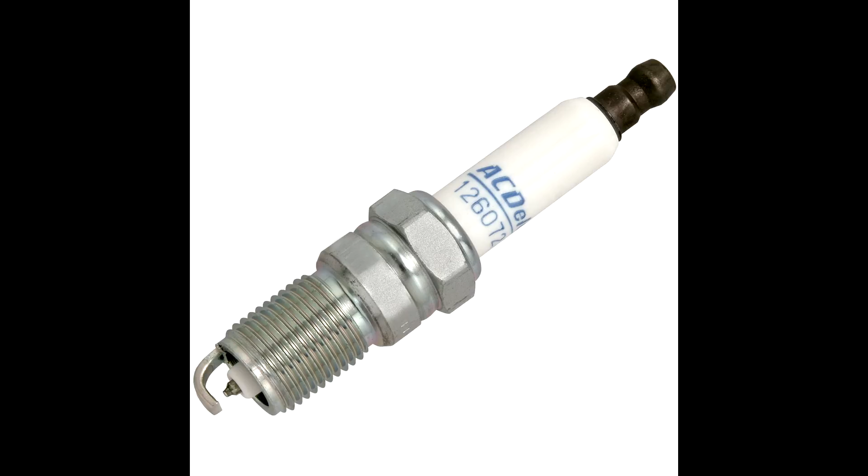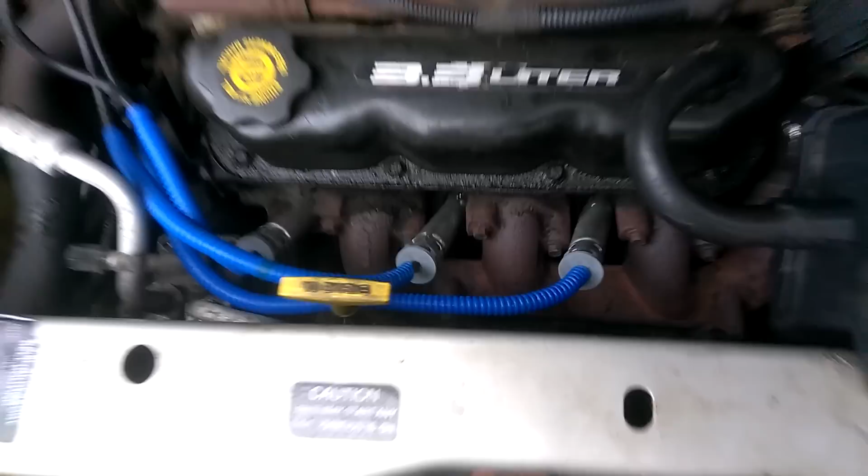I assume if you've clicked on this video, you already know you have a no spark condition. However, I'll just quickly go over what that means and how to determine if you actually have it. No spark means that your spark plugs are not firing. Unless all your spark plugs failed at the same time, it probably has something to do with the electrical system preceding your actual spark plugs.

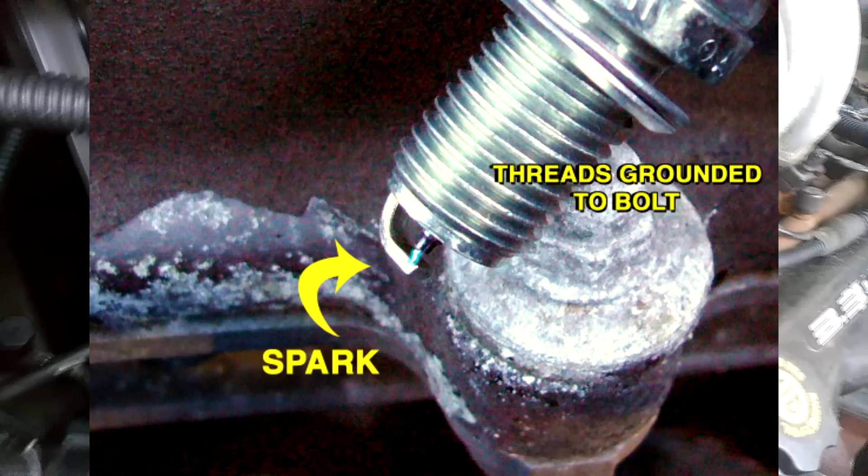The easiest way to test this, of course, as you've probably done, is to unscrew a spark plug, put it into the wire, the little socket that you removed to take the spark plug out, and ground it, crank the engine, and see if the spark plug turns on or not.

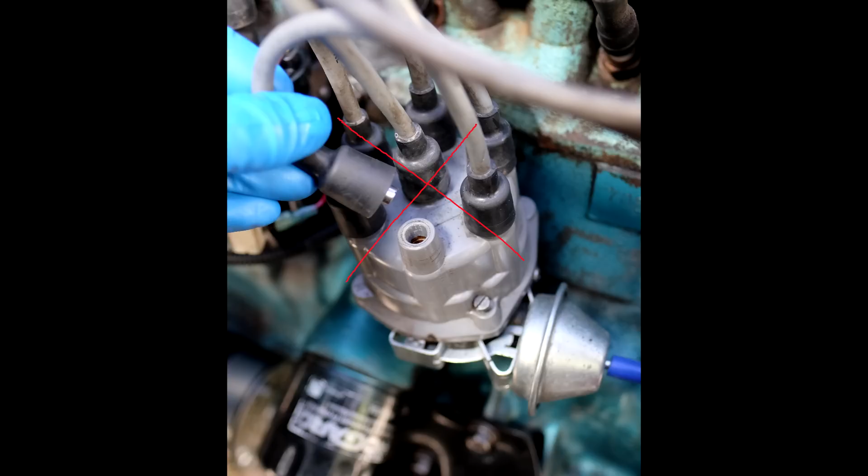Chances are all your spark plugs probably aren't worn out, so we can move on to whatever is right before the spark plugs. Now, my engine is a distributorless system, which means I only have a coil pack right before the spark plugs.

Now, before you go into testing your ignition coil pack using a multimeter and checking different resistances, see if they line up, it's easier to just unplug the actual connector that goes into the ignition coil and test if you have power there. It's very helpful to have a test light here since it allows you to easily verify whether or not you have power going through a connector.

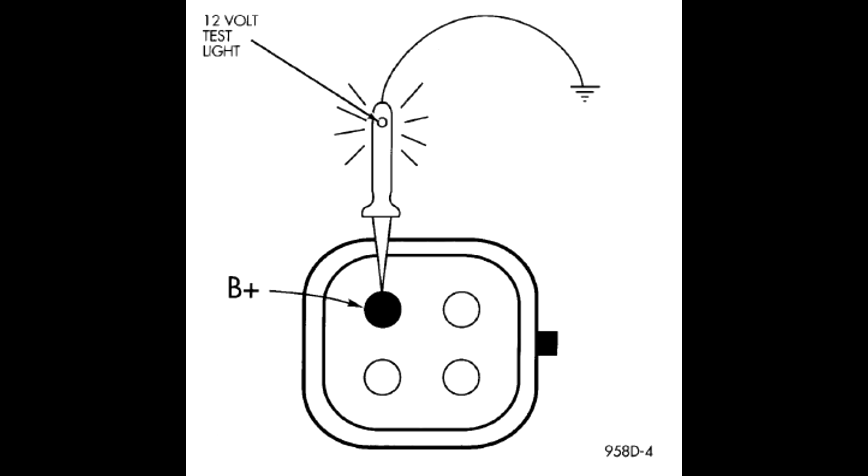What you're going to do is plug in one end of the test light into the battery plus terminal and have the other end just go to ground. Any bare metal surface on your car will do, assuming that piece of metal is grounded.

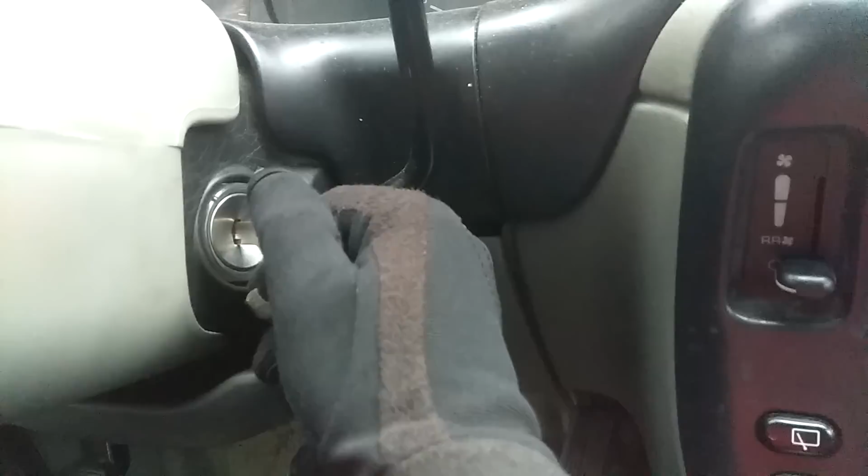With that in place, we're going to put the key into the ignition and turn it to just before you would crank. I'm going to refer to this as key on, and it's not the same thing as cranking the engine. Cranking is when you go one step further and you twist the key a little more, there's a little spring and you feel resistance and the starter motor starts turning.

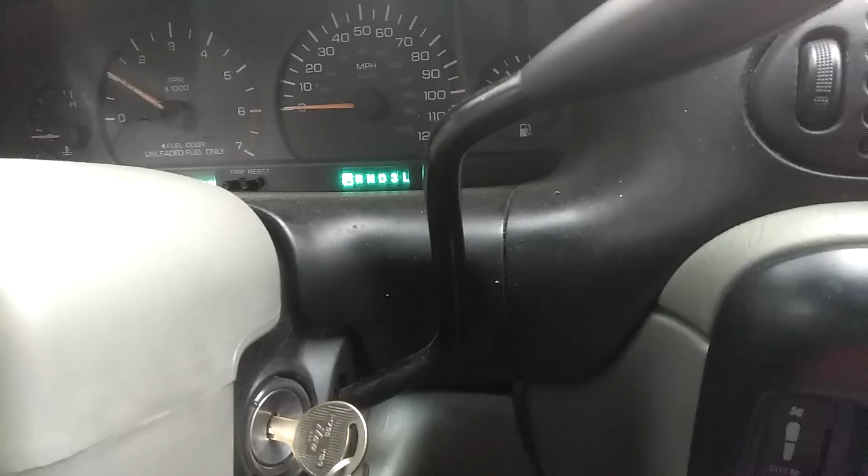If you put the key on and you leave it there, what should happen is the light should flash on, and then it should turn off after like 1 second or so. If your light does turn on momentarily and then turns off, then you're good. If your light, however, does not turn on at all, that means that there's an issue with your ASD relay. That's the auto shutdown relay.

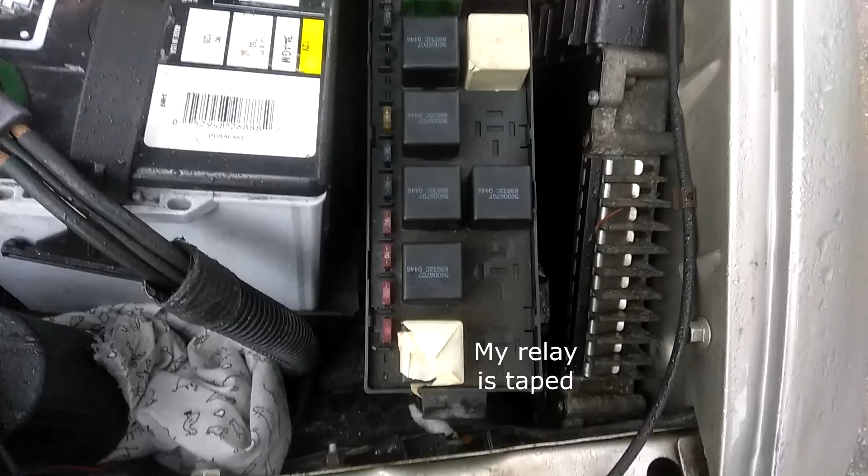The purpose of this system is to avoid unnecessary fires by turning off power to the injection systems, the ignition system, and overall just making sure that your engine shouldn't be running when the car is not on. The ASD relay will be located in your fuse box, and you can look at your fuse diagrams to figure out exactly where it is.

There should be a couple of other relays, the little cube looking things, that are exactly like it, and you can just take one out that looks unimportant based on the wiring diagram and put it in your ASD relay slot. And if you do the light test again and it works, that means the individual relay that you took out and replaced is bad.

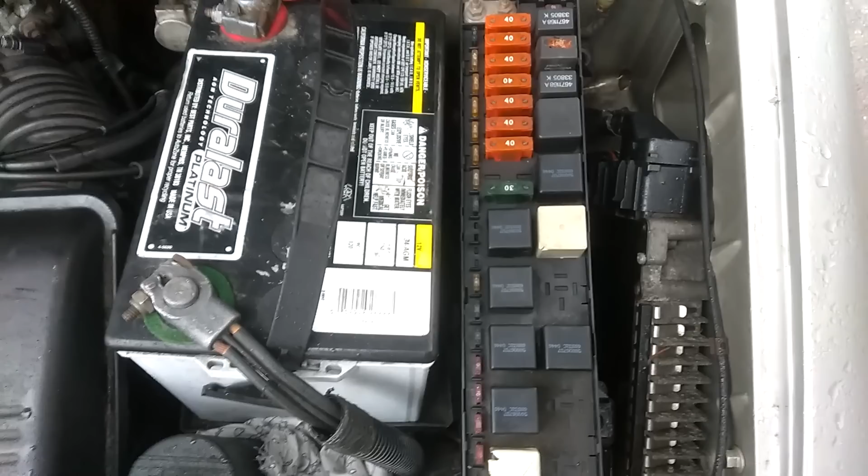You could, of course, go to AutoZone or RockAuto or somewhere online and buy a new relay, but generally it's kind of a waste of money because you can just test one of the other relays that you have in your car that belongs to like the windshield wipers or something rather inconsequential compared to the actual ignition system.

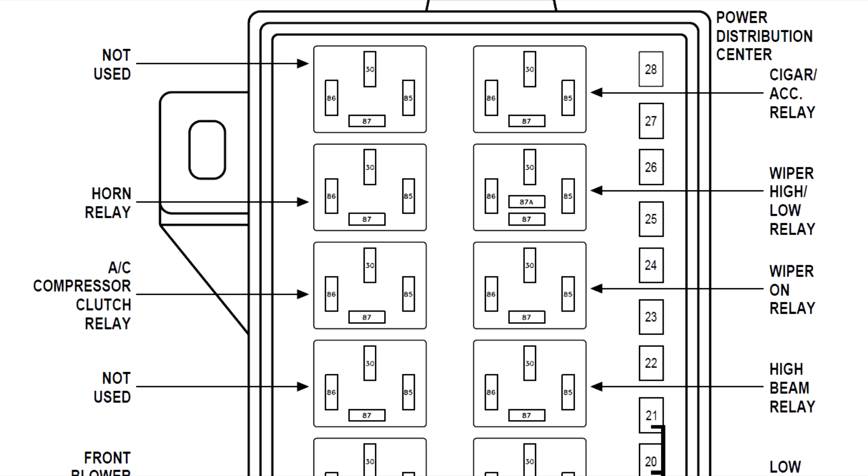Moving on, if your ASD relay is good, which means that your light turned on when you put the key on and then turned off, please note that in the following test you have to put the key on and wait for that ASD relay to flash before you begin cranking the car. If you don't do that, you won't be 100% sure that your crank is what's setting off the light or if it's the actual ASD relay going off. That's why every time you do it, you have to wait a couple seconds for that ASD relay to go off, and then you crank.

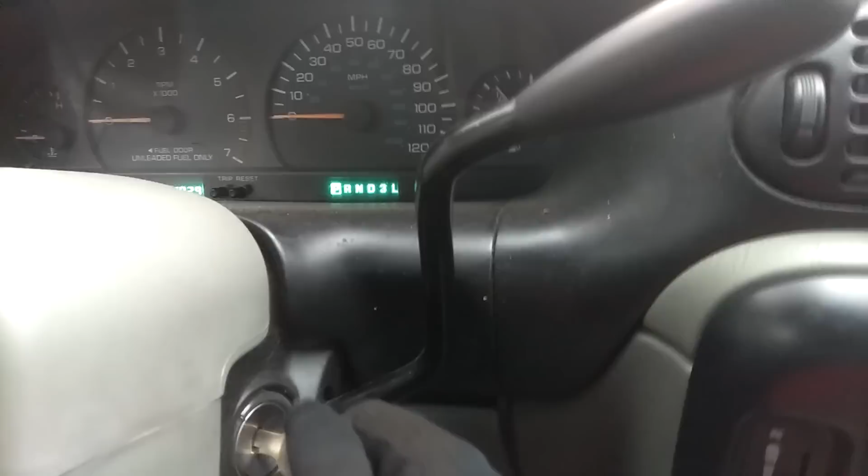Now what you're going to do is you're going to crank the engine. And there's one of two things that can happen here. If you crank the engine and the light flashes, that's going to be the first option. Or you crank the engine and the light does not flash.

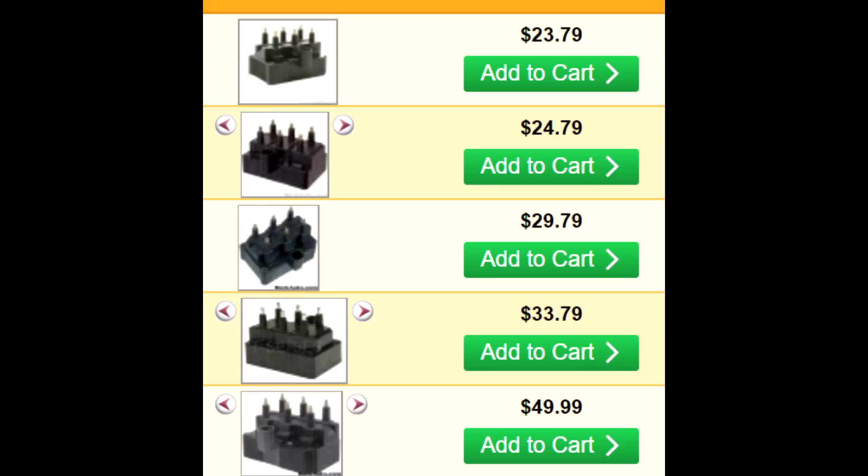If you're getting a steady light when you crank the engine, that means that you are getting constant power to your ignition system. And your power issue lies between your connector and the spark plugs. So either the ignition coil is bad or your spark plug wires are bad. And these are both very easy things to test. They're pretty cheap parts regardless. The service manual covers all the specifications for testing these components.

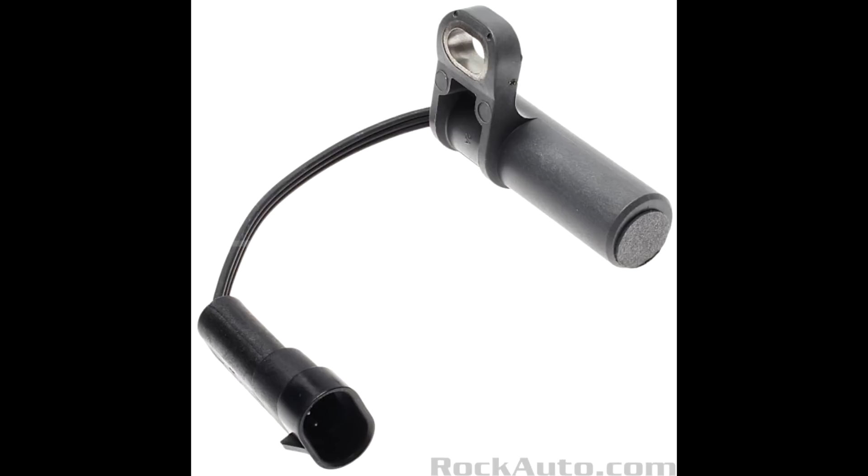If your test light flashes momentarily when you crank the engine, that means that your crankshaft position sensor isn't getting a signal to the PCM. This can either be an issue with the wires coming out of the sensor or the sensor itself, and we'll cover how to test all this later on in the video.

If, however, like me, you are not getting a steady light on when you crank the engine, that means that you are not getting power to your ignition system when you're cranking. And this test is very helpful right now because we know for a fact that the wiring between the PCM and the ignition coils is good, because in our first test, our light turned on. However, it's only when we crank it that we don't get power to that.

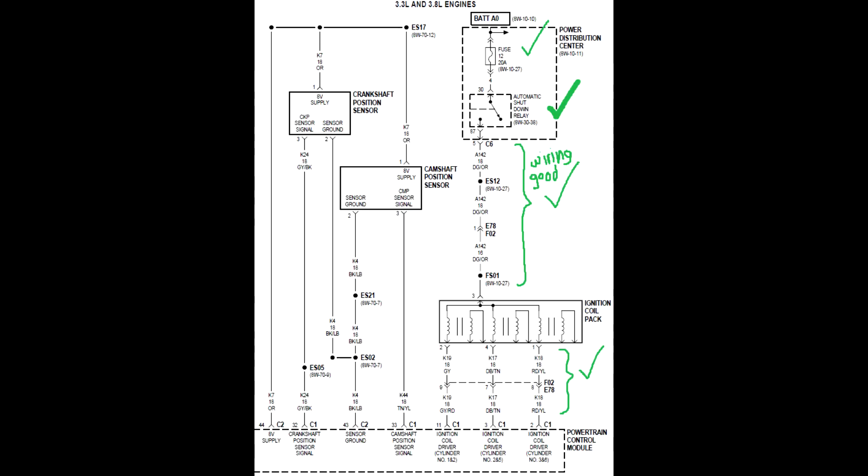The next part of the test involves unplugging the crankshaft position sensor, and that's located on the bottom right part of the engine. It's a little tough to get to, but you don't actually have to unplug the sensor from the engine. You just have to unplug the connector that goes from the sensor to the rest of the wiring. If we crank the engine again, we should have one of two results now. Either we're going to have a flash or we're not, and both of these tell us quite a bit.

If your light did flash, that means that your crankshaft position sensor, the one you just unplugged, has a short in it, and you just need to replace that part. Or if you replace the part and it still doesn't work and you repeat the procedure and you get the same issue, there's a short in the wiring after the connector to the sensor.

The other option is, of course, that you didn't get a flash at all. And this is the toughest of the options, and of course it's the one I got. What this basically means is that there's an issue with the wiring of either the crankshaft position sensor or the camshaft position sensor. Of course, this could also mean that the sensors are just bad, but that should be a pretty straightforward fix. You just swap the part in and replace it. The tough part now becomes figuring out what part of the wiring is bad, or are the sensors bad?

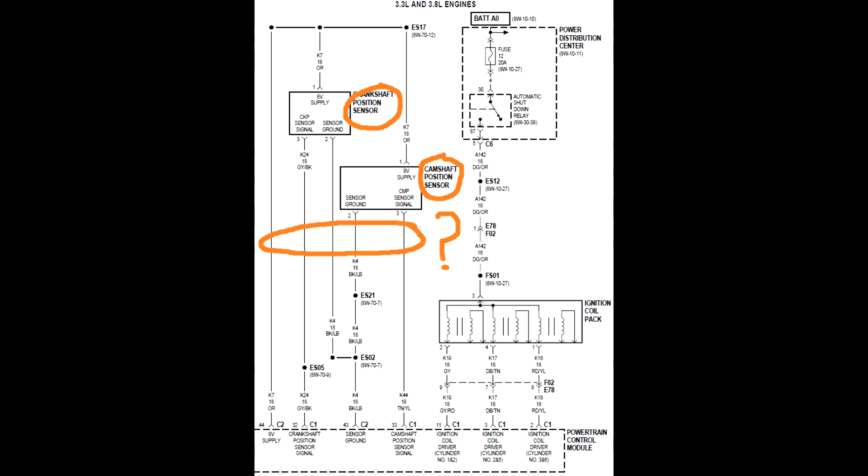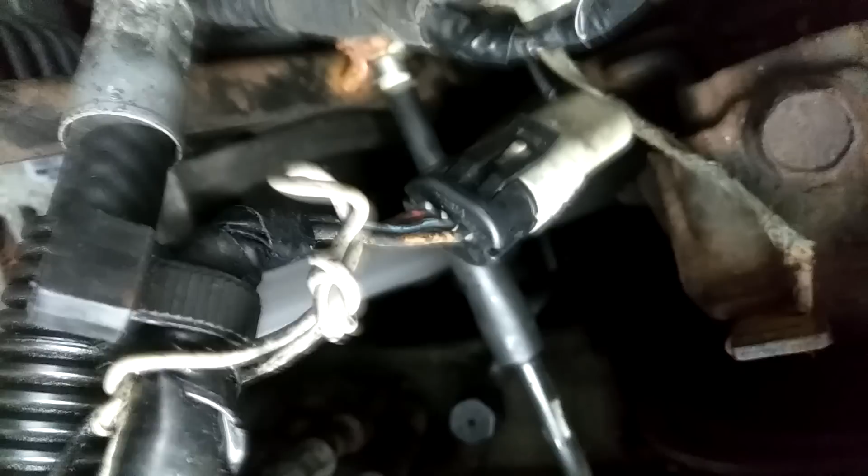Both of these sensors have 3 wires that come out of the sensor, and the setup is exactly the same. One of them is an 8-volt power supply to the sensor, one of them is a signal ground, and one of them is the actual signal itself. Please double check with your wiring diagrams. However, on mine, on the 3.3 liter engine, your 8-volt power supply is on the rightmost pin if your latch is on top. The sensor ground is in the middle, and your sensor signal wire is the leftmost one. Just to confirm, your 8-volt power supply will be an orange wire, your ground will be a black wire, and your sensor signal should be a yellow wire.

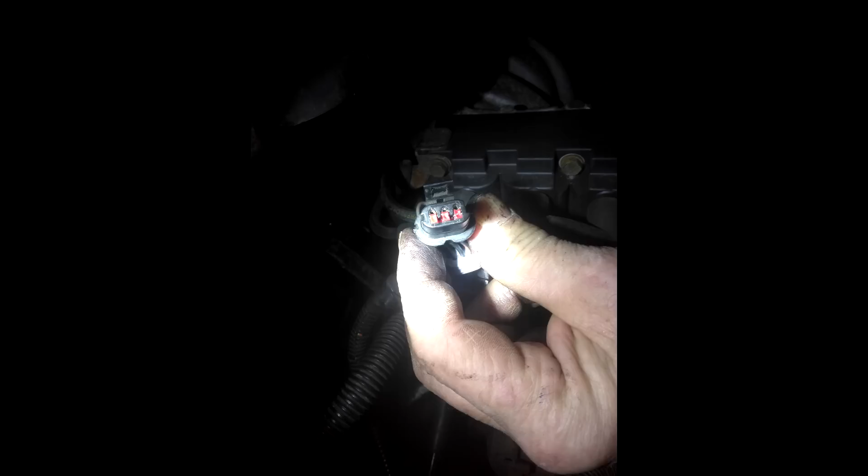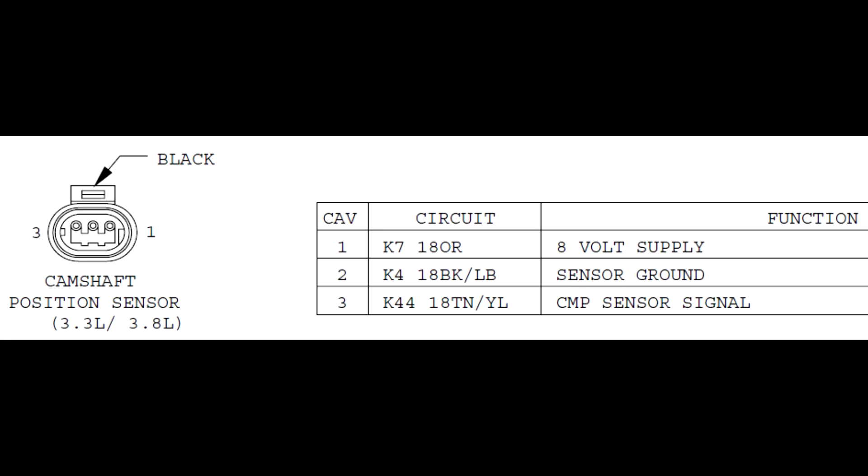So what are we going to do now? Basically, all we're going to do is unplug the sensor cables and check for continuity and what resistance we have between the sensor connector and the PCM connector. Now, if we look at our wiring diagram, we can see that we have circuits K7 18 OR orange, circuit K4 18 black, K44 tan yellow. So we're just going to find these and see where they end up on the PCM pinouts.

Now we're just going to look at our PCM pinouts and identify which circuits correspond to what pin. The camshaft and crankshaft sensors are pretty easy to find. You're going to have 2 connectors, C1 and C2. All that you want on C2 is pins 43 and 44, which correspond to the same circuits for our sensor ground and our 8-volt supply. And on our module for C1, you have to make sure that you're on the right engine. We're going to use our crankshaft position sensor signal at pin 32 and our camshaft position sensor at pin 33.

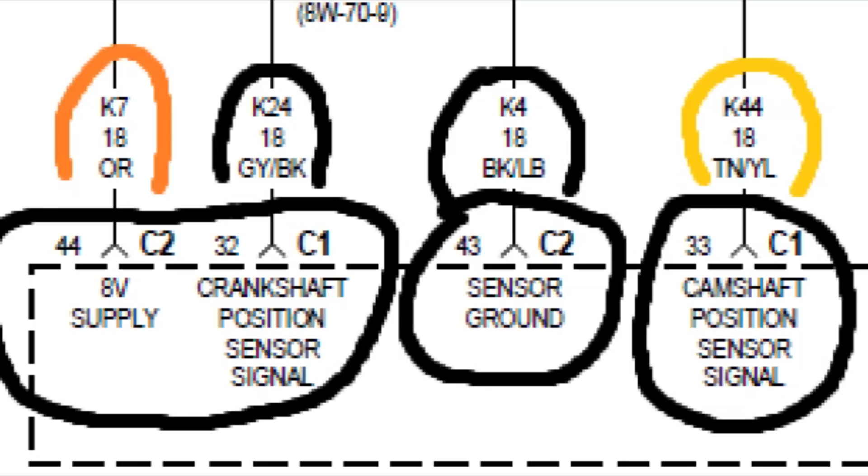So now all you're going to do is take one of your multimeter leads, put it into one of the pins on the sensor circuit connector, and put the other lead to the corresponding pin in the PCM. Just don't shove them in there because these pins are quite delicate. You don't want to warp the inside of the connectors. Now we're going to put our multimeter on continuity or a diode test. That's the one where if you touch the two probes together or touch the two ends to a continuous piece of wire, it'll beep.

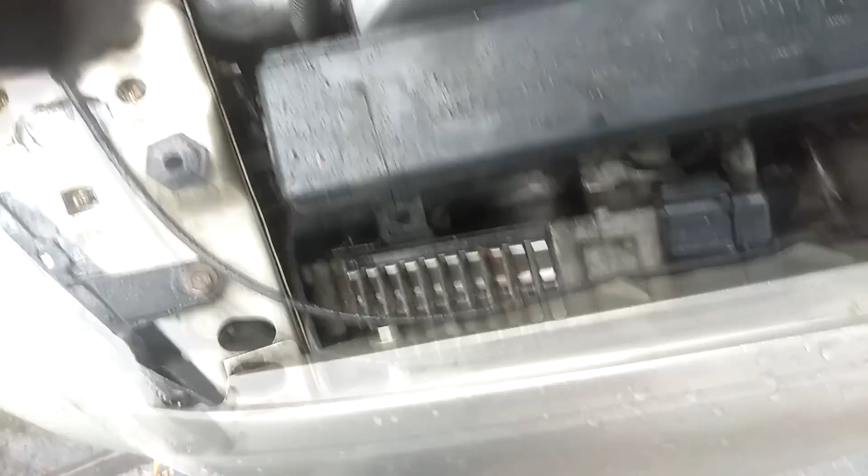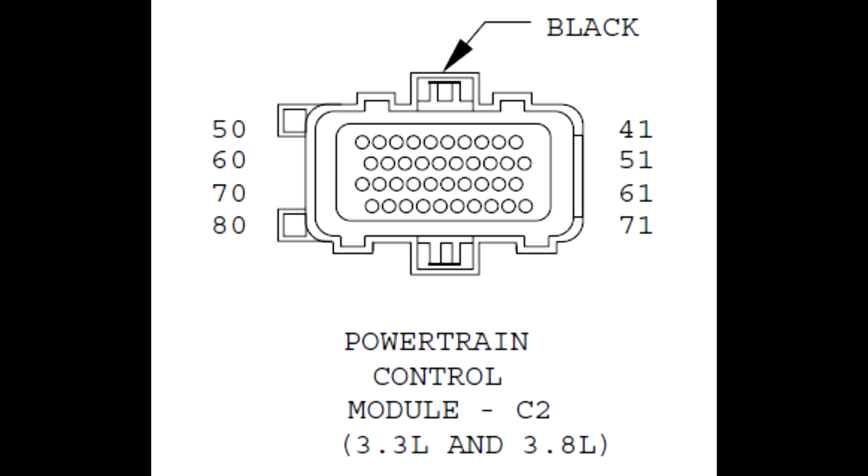Now all you have to do is, for example, if you want to check the sensor signal for the camshaft position sensor, put one of your leads on the sensor signal connector, and then put the other one on the pin corresponding to the camshaft position sensor signal, which would be pin 33. And you're going to repeat this for both connectors, and make sure that all the wires have continuity and fairly low resistance, preferably below 1 ohm.

If you don't have continuity at all, you can try sticking a needle in the wire, a very small needle, behind the connector itself to make sure that the wire is not broken. Otherwise, you know that your actual connector is wonky and that the connection between the connector and the wire itself is bad. So what do you do if one of your connections is bad?

Well, you have to track down that wire and find where it's broken. And if you can't do that, you're going to need to somehow splice the wire from the PCM to the actual sensor itself. That's kind of a tough job in and of itself, but I don't see any other way of doing it short of taking apart the entire wiring harness and finding exactly where that is, although that is the cleanest case. That is the best end result.

And the alternative, of course, is what happened to me, where I test all these wires, check them all for continuity, and they're good. All the wires are good. So what's the deal right now? Now we have to test whether or not our sensors are outputting the proper values that they should, and whether or not they're working correctly when we actually crank and start the engine.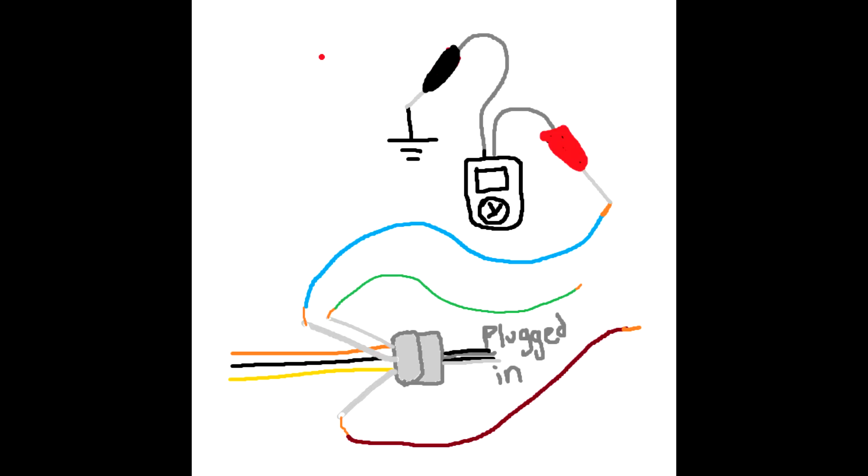The tricky part, of course, now will be testing the sensor signal wires when the car is being cranked. Most multimeters won't be able to resolve the signal quickly enough to actually get you a real reading. The actual signal that is going from that sensor alternates between half a volt, so 0.5 volts, and 5 volts.

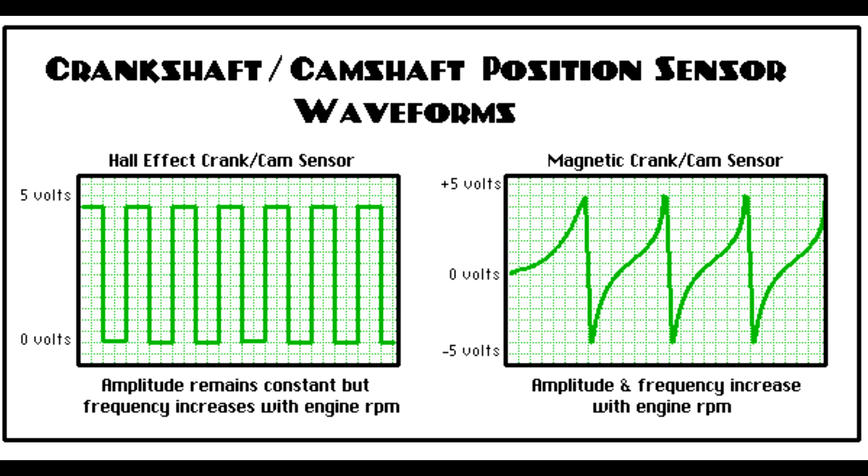Because the camshaft and crankshaft position sensors are detecting little notches in a flywheel that are, I don't know, maybe ½ inch apart, and the flywheel rotates at 300 to 400 rotations per minute, the time between a ½ volt signal and a 5 volt signal will be a couple of milliseconds. It's extremely quick.

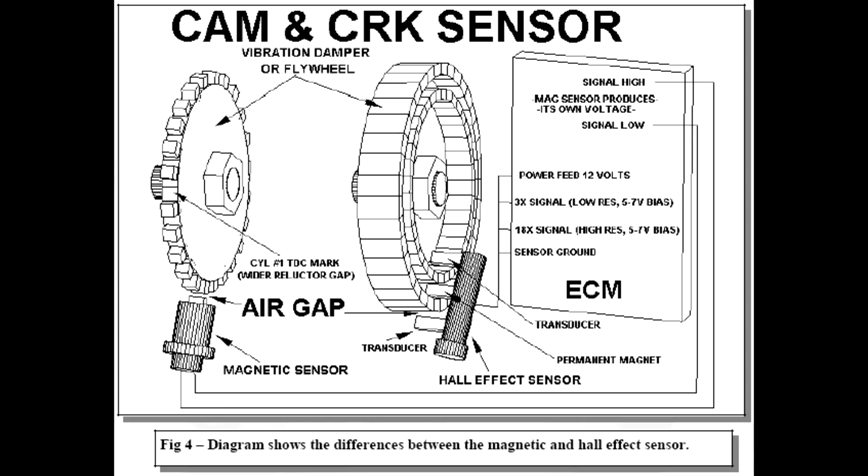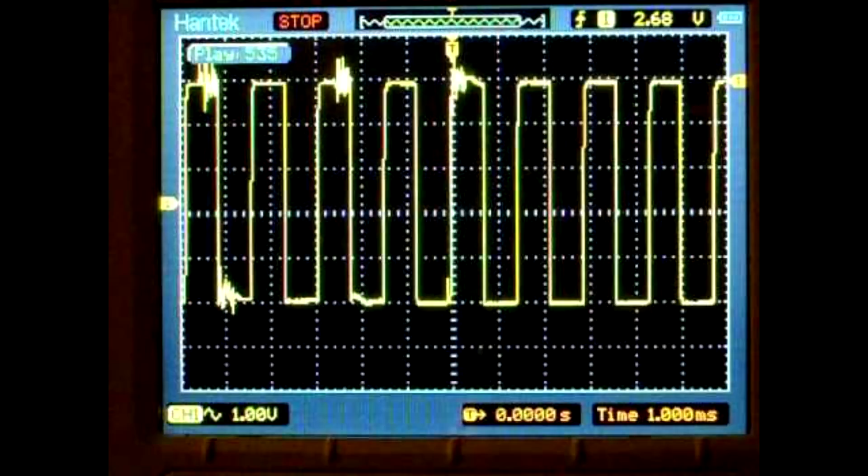If you had an oscilloscope, it would be very easy to actually see what those values are because you have a voltage versus time graph, and you can just look back, change the scale, and examine what your peak voltage times are. However, in my case, I don't have $300 to $400 to spend on a scope, so I'm stuck with my multimeter, which updates, I don't know, maybe 5 times a second.

When you're reading your crank values for your signal wire, I've found that an acceptable value will be 3.5 volts. Now, obviously, your value will fluctuate. You'll see a bunch of zeros, you'll see a bunch of maybe sixes. Generally, because the multimeter averages by taking a root mean square, you'll see around 3.5 volts.

Since you have no way of actually resolving whether or not you are getting 0.5 volts, then 5 volts, unless you have an oscilloscope, it is very, very important that you stick to this 3.5 volt rule. Make sure that both your camshaft and your crankshaft position sensor signal wires are reading the same value on your multimeter when you're cranking your car.

In my case, I had the proper 3.5 volts on my crankshaft position sensor. However, on my camshaft position sensor, I had 2.5 volts. And at first, since I was doing this for the first time, and I didn't really have that great of a multimeter, I figured, hey, 2.5 volts is good enough. As long as it's reading something, it's probably good enough. I was very wrong. It has to be 3.5 volts, or one of the sensors has to match the other.

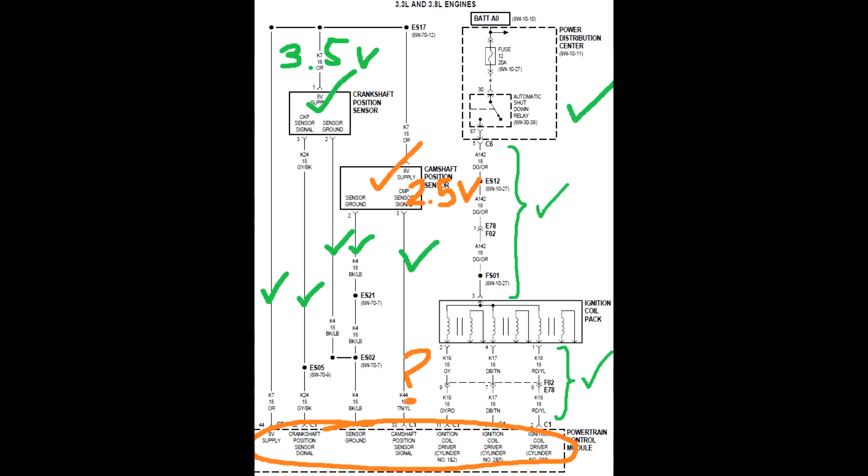I ended up purchasing an identical PCM for my vehicle, same exact engine, same features, and this is important, but the year doesn't really matter. These Dodge Grand Caravans, I believe, range from 1996 to 2000, so the years are generally the same, but you have to make sure that if your car didn't come with an alarm, a security system, that the computer that you're buying also did not have an alarm, because that could lock up another computer inside your car called the body control module, and you don't want that to happen. It's a pretty expensive part.

So just order your PCM online from someone. They'll flash your VIN on, everything will work fine. Usually what happens is you buy it online, they ship you theirs. There's a shipping label in the box, you send it back. It's called a core charge, and you're good to go. Sometimes it's a little easier to just buy the ones where there's no core charge.

That's just my recommendation. When I had my new PCM, I verified that the computer was good, since what are the odds that two separate computers have the same exact little problem where one of the sensors is not getting picked up by the PCM? The odds of that are infinitesimally small when it comes to thousands and thousands of components in one of these computers. So the only thing I had left at this point was my voltage discrepancy between my camshaft position sensor and my crankshaft position sensor.

Because to summarize, my wiring is all good from the sensor to the PCM. Now I know my PCM is good. The ASD relay is good. The wiring from the ASD relay to the ignition coils is good. So what's the deal here? The only thing I have left is my 2.5 volt versus 3.5 volt sensor difference. So I go in and check my camshaft position sensor, because that's the one that's reading lower than what I read was the nominal voltage.

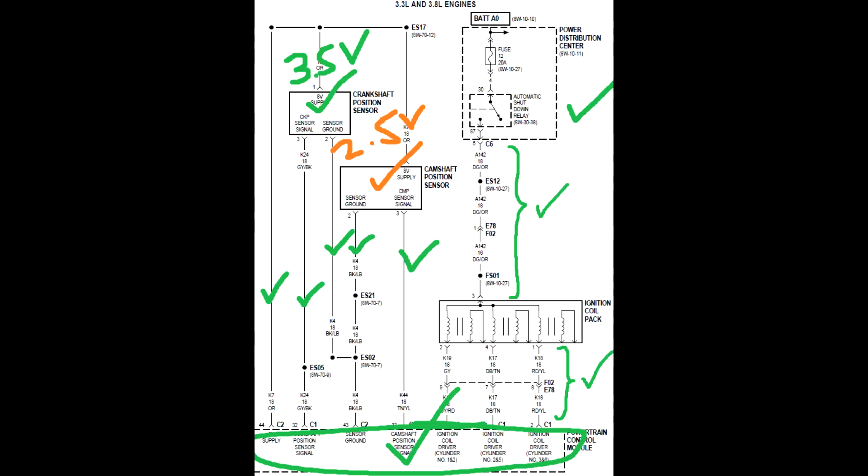And the sensor looks fine. It looks completely fine. But my dad and I replaced this part maybe 3 or 4 times, and it ran fine. But this last time when things didn't work at all, the sensor spacing was off. And when we reinstalled it properly, we realized that you have to twist it a little and push very hard on ours to get the sensor to fall just very slightly deeper than it would if you put it in normally.

And the little paper that comes on your sensors, that's the right thickness, that's the right spacer for the gap. You have to make sure that your gap is anywhere from 1 to 1.5 millimeters from the actual flywheel. That's what the paper spacer is for. It's very important that you maintain that distance. In our case, since the sensor didn't go in all the way, it was reading a very slightly lower voltage, and the PCM wasn't picking up the camshaft position sensor signal. When we actually put it in properly, the car started up fine.

So we spent 3 days and nights trying to diagnose what the problem was, running wire traces across all these different components, confirming everything works, just to find out that we didn't put it in properly. One little stupid rookie mistake, and the whole engine wouldn't start. We finished it on Saturday afternoon.

We had until Monday to move our car for street cleaning, and this car was like a total piece of junk. We were ready to call the tow truck to take it to the junkyard and scrap this thing. I think if we didn't get it at that point, we would have called the tow truck and gotten it junked, completely scrapped. It's one tiny little mistake.